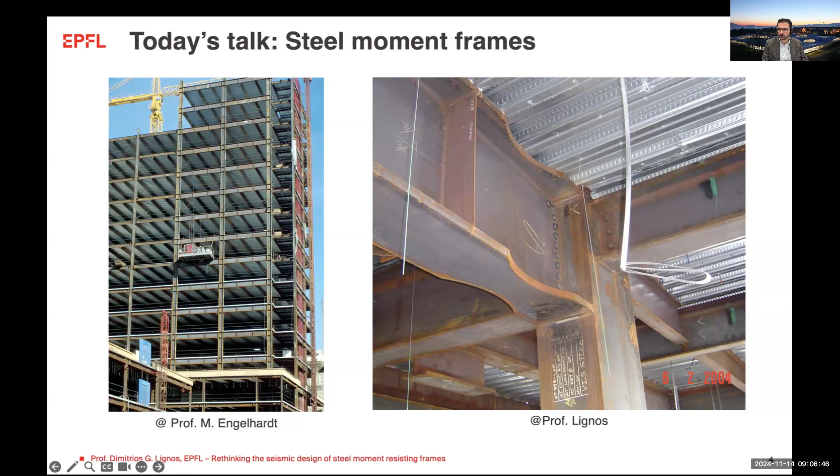A quick overview: as we know, a moment-resisting connection after the Northridge earthquake, primarily based on work done during the SAC project, will be assembled using mostly a strong panel zone design where energy dissipation is localized in the beams. Through local buckling, we anticipate the beams will absorb the energy released by the earthquake. Now, for the welded connection, usually you'll use a backing bar that we remove and back gouge, perhaps reinforced with a fillet weld here, to ensure the fracture potential of the connection has been reduced, at least based on what we knew, or know, today.

For capacity-designed steel moment resisting frames, what we call in Canada ductile moment frames, the intended dissipative zones during earthquake events would be more or less at the beam ends. Assuming the connection details are done correctly, plastic deformations will localize in the beams, and after flexural yielding, we would anticipate local buckling within the dissipative zone. Or if you're looking at the base of the columns, these are fixed-end columns - in this case we should anticipate plastic deformation near the fixed end, potentially followed by local buckling, as we see here in this photo.

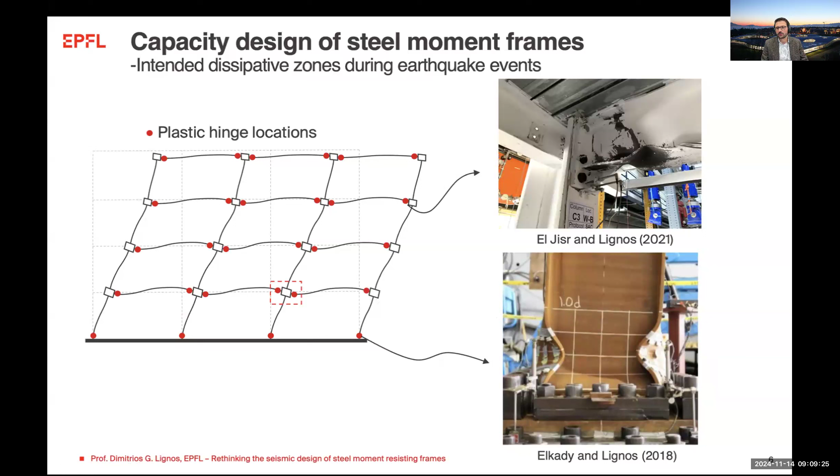But if you are looking at this from a financial perspective, then this damage that I show here would potentially have to be repaired, or if the building essentially ends up having a very large residual, then we would consider the potential for demolition.

We've done loss assessment in several steel moment resisting frame buildings, and we looked at monetary losses due to repairs after an earthquake. This graph is indicative, showing expected losses as a function of seismic intensity. For seismic intensities at a design level earthquake, losses are governed by structural repairs as well as repairs in the non-structural content.

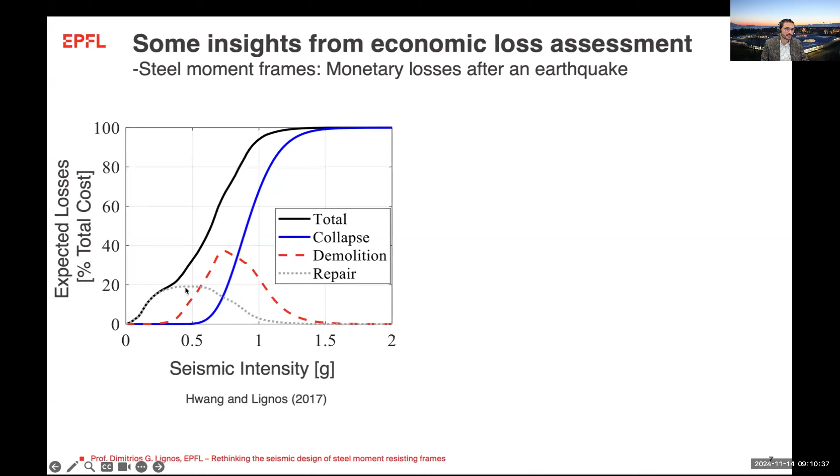But when the seismic intensity increases, the dashed red line demonstrates that demolition may be a critical factor prior to the case where collapse controls losses. That would be under a rare event where the spectral or seismic intensity would be very large.

If we look at what this means for a steel moment frame as part of a building, for repairs you're going to need structural repairs because of local buckling at the fixed end shown earlier. If you're looking at the connection, you focus around the dissipative zone, mostly related to the beam that experienced flexural yielding and eventually local buckling. Judging this way of dissipating energy from a structural repair standpoint, this is not going to be very economic because it has to be fixed in the aftermath of an earthquake.

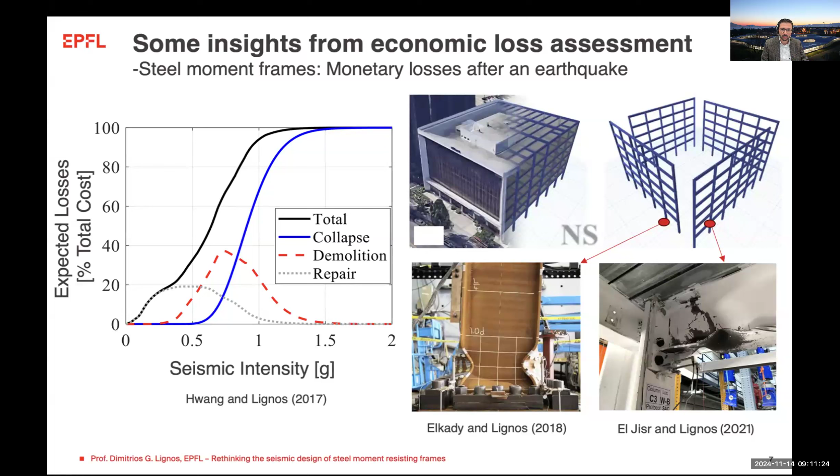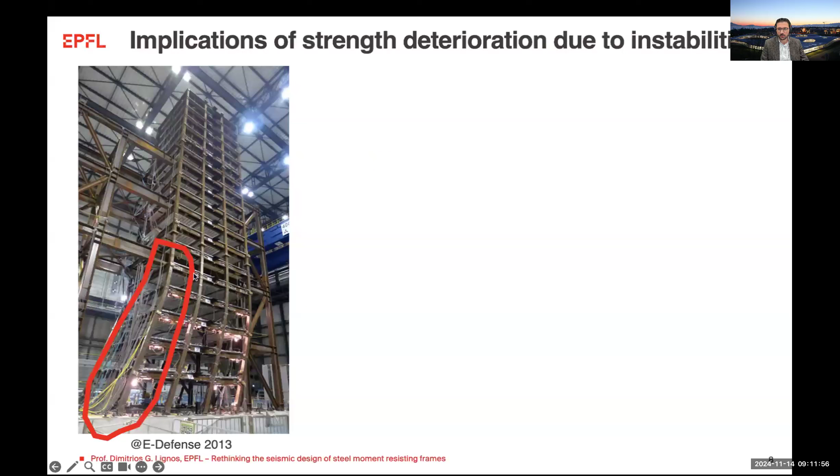Instabilities also have an implication on degradation and potentially structural collapse. Looking at a test from a few years ago at the E-Defense facility, a moment frame, due to the mode of deformation, would tend to localize deformations in the bottom stories. For seismic intensities related to modest events, we would get more or less the anticipated mechanism with damage in the beams as well as damage at the base of the column.

But if strength degradation kicks in because of the instabilities, then usually the beam marked with red is going to degrade. That creates redistribution in the system, and you would anticipate larger moments in the columns that, for larger or rare earthquake events, could potentially lead to plastic hinges in the columns, and eventually you could have structural collapse.

Because of this, engineers, or at least people like me, are interested in estimating the probability of structural collapse for moment frames as well as other systems. This is a graph that I usually use from Professor Krawinkler.

If you look at one ground motion and plot the seismic intensity versus the maximum story drift ratio, if the system doesn't experience degradation and you worry about second order effects due to gravity, then usually this could carry on for very large intensities.

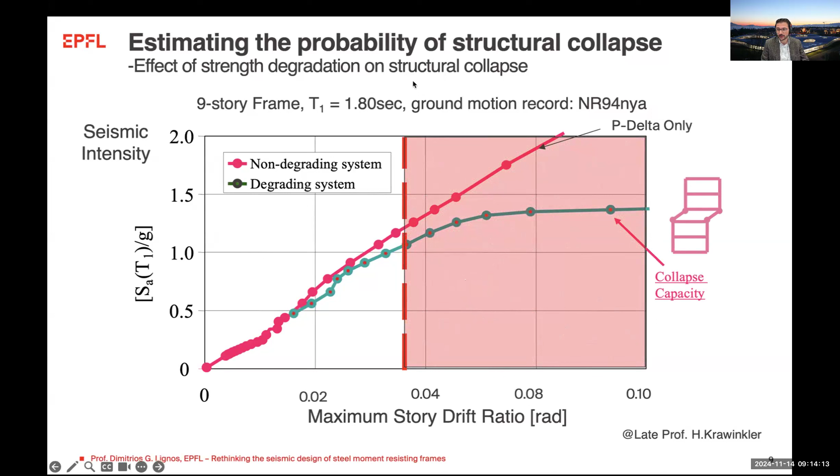Usually that can be done if you use models of certain sophistication, so you can actually simulate the influence of strength degradation on overall structural performance. These models have been around, and if some of you use them, you might have run into my name, especially on steel structures. They could be concentrated plasticity models, or fiber models, or rarely continuum models with higher fidelity.

What happens with these models is that you have to kind of predict relatively well when would be the onset of strength degradation. But based on our experience from test data as well as simulations, generally this point is associated with fairly large variability, and that variability gets transferred into these models that we use for predicting probability of collapse.

So now the question is, are you really predicting the probability of collapse accurately enough so that you can minimize the risk of collapse in degrading systems?

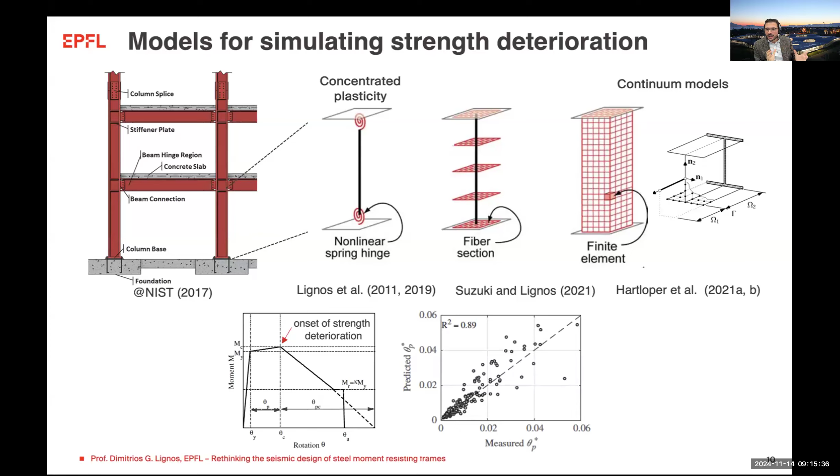At some point, when I was working on this, I started thinking, where should I go from here? Because most of my work relates to moment frames, I was thinking, is this really the right way of doing this? Or could there be different ways we could consider, perhaps rethink the design process, or rethink about technology, so that we can stay away from instabilities, potentially reduce uncertainty, and potentially reduce repairs. So when I was in California...

I read somewhere this interesting quote by Professor Ed Wilson from UC Berkeley, where essentially he was saying that instead of trying to develop more complex models to capture the variability of structural response, like the models that relate to the early part of my work as an academician, we should be designing structures that are less sensitive to uncertainty.

That made me think about how we could rethink the seismic design process of steel moment resisting frames, so that we can achieve such an endeavor. In the rest of the presentation, I'll be focusing on two things. The first is if we can identify or rely on alternative dissipative mechanisms than those of the current status quo, with which we could potentially stay away from instabilities, or at least delay them, and potentially reduce model uncertainty.

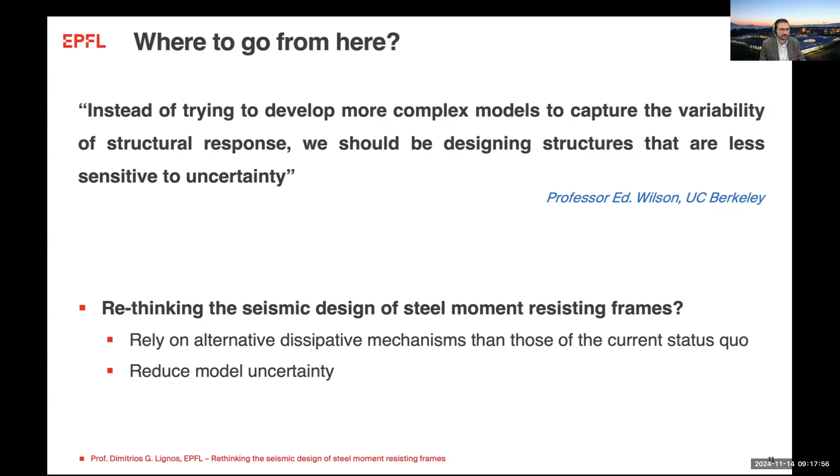I will start by identifying alternative dissipative mechanisms, and I'd like to stress the beneficial aspects of shear yielding, introduced firstly by Professor Krawinkler during his PhD thesis back in the 70s, done with Professor Popov and Professor Bertero, where they were looking at the potential behavior of panel zones.

Or moment-resisting connections that exhibit high inelastic behavior in the panel zones. What we know from this work is that panel zones usually exhibit shear yielding, and the behavior can be extremely stable even at very large inelastic shear distortions. If you look at the overall behavior of the connection itself, for very large drifts in the range of 6%, we get no degradation when the panel zone participates more into the energy dissipation of the joint.

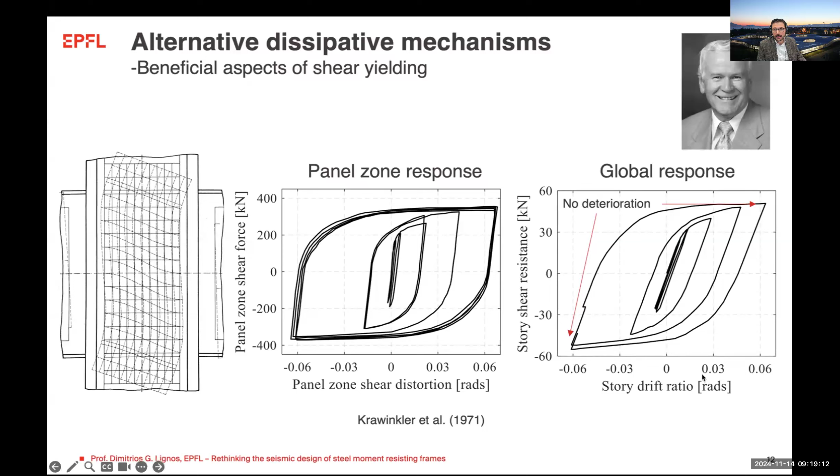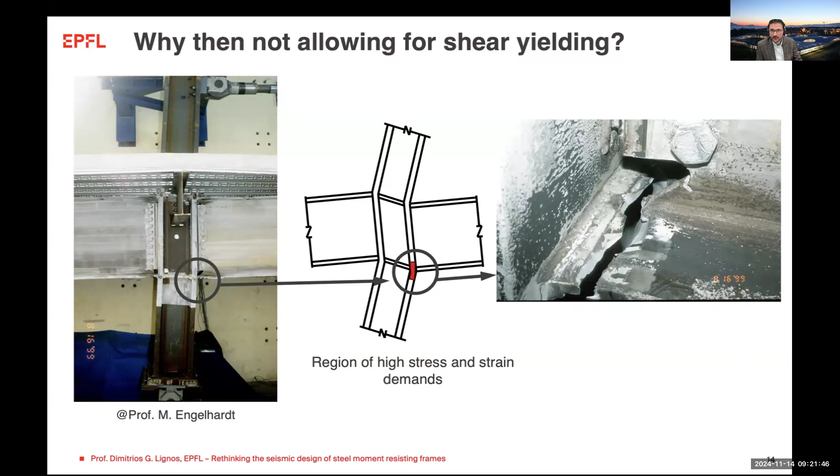But then the question is, if fracture does occur, what is really the drift at which this is actually going to happen? So we've reviewed and put together test data from post-Northridge connections, and you can download this data from our website. This is an interactive website where you can filter data on connections. If we set up the requirements to be post-Northridge connections, you can see out of these connections how many, in fact, experience fracture when we push the panel zone to be highly inelastic.

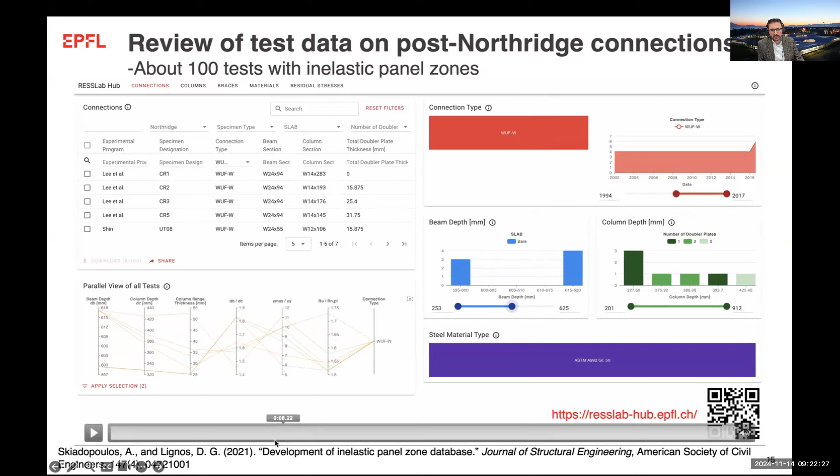So then the question is, if it's fairly marginal, do we really have the tools to be able to allow for inelastic design in the panel zones and kind of relaxed requirements in the beams. So what are the missing aspects that we have to accomplish such a design?

One of them essentially relates to limitation of the current design models to leverage shear yielding in a design context. The current codes use a trilinear model to design the panel zone, where you have to predict Vy and Vp. Vy is the shear at which the panel zone exhibits uniform shear yielding. Vp would be the plastic resistance of the panel zone, assuming that it reaches 4 gamma Y.

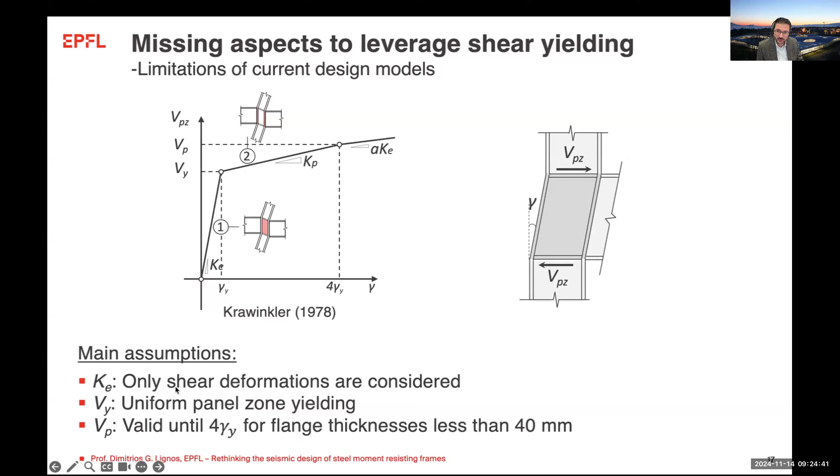What we see from these models is that essentially the elastic stiffness of the model is only considering shear deformations. This is why, when you compare the predicted stiffness from these 100 tests we reviewed versus the measured stiffness, we see deviations between the predictive model used in design and the actual stiffness, and these deviations could be in the range of 20%.

That's if you are comparing, for instance, with the model in the AISC provisions or the previous model in the Canadian provisions. But the same happens if you use other models available in the literature.

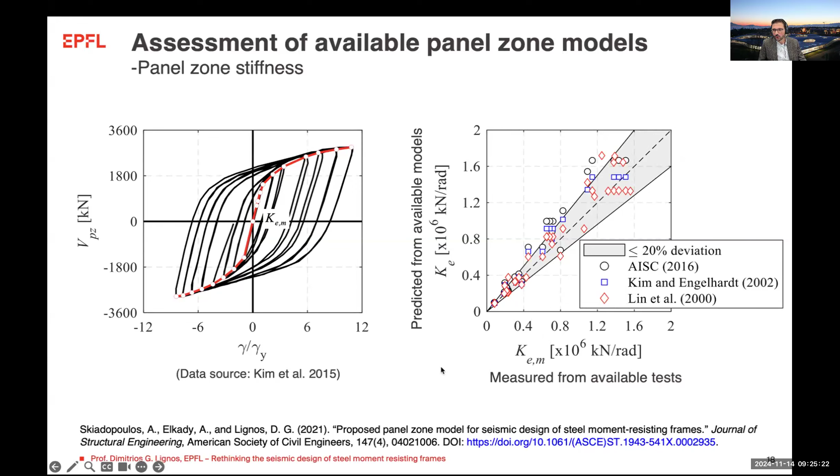So our first task here is to take a fresh look at the problem to develop a better panel zone model so that we can leverage it in the design of actual moment frames. The way we did this is by using continuum finite element analysis.

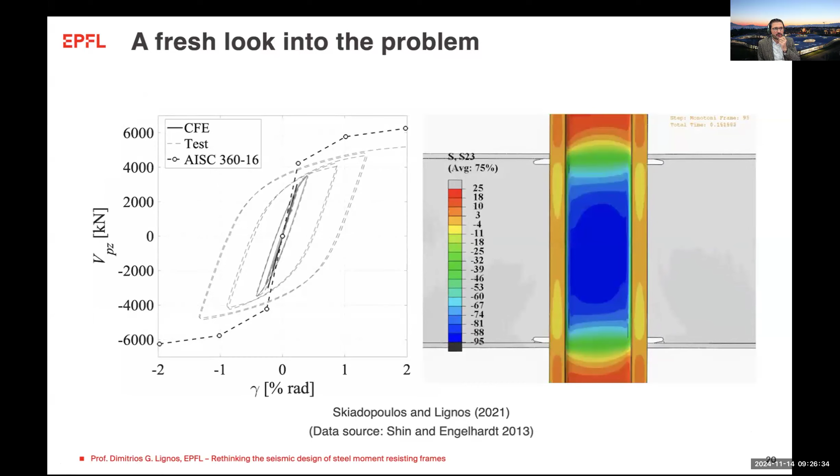With models such as the one you see here, we were able to predict relatively well what is happening in panel zone geometries in these 100 tests, but also a lot more geometries that we looked at, so that we can understand what is really happening in the panel zone and under what conditions. This finite element model is able to predict well, more or less, this test data in the literature.

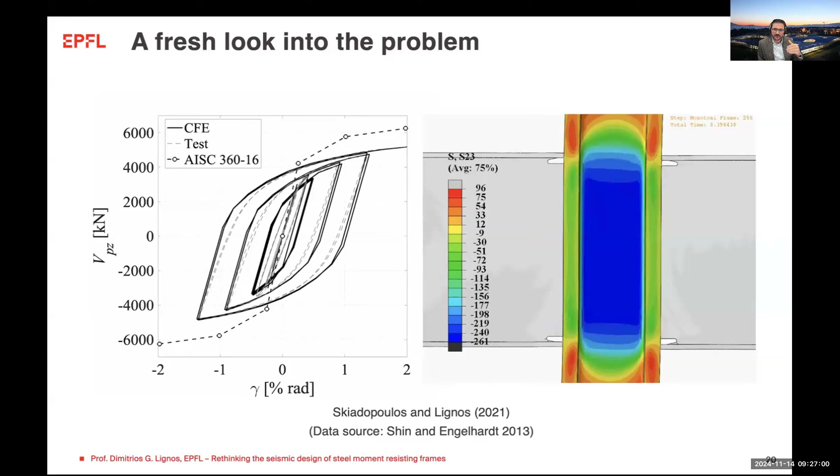But you also see something else: when you use the current AISC provisions, or the model that is in the current AISC provisions, that model overpredicts stiffness and overpredicts strength. This is why relying on panel zone shear could be an issue if you are not predicting strength correctly, because then you have not tuned the strength accordingly.

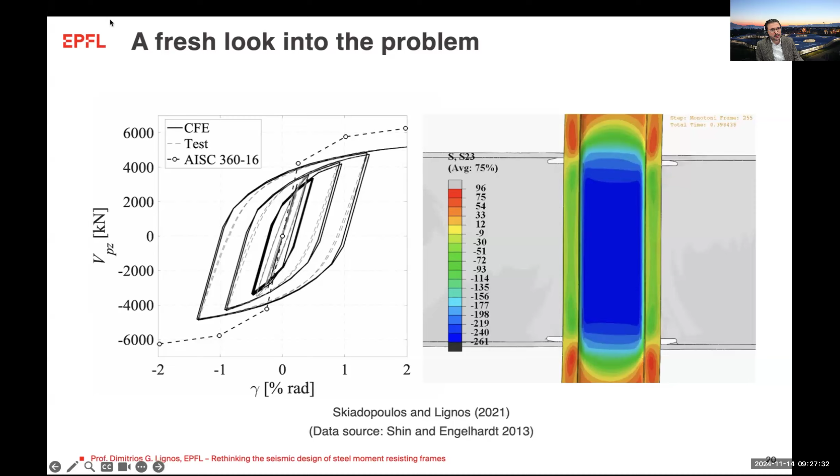So to fix the problem with stiffness, we developed a model that is able to trace not just shear deformation in the panel zone, but also the contribution to bending because of bending in the flanges. That could be important, especially if you're dealing with very deep beams that are characteristic in North America.

With a simple model here, you are able to capture both the flexural and shear contribution to the elastic stiffness. Now, if you compare the predicted stiffness of this model versus the one measured from the 100 tests I showed, you see that I can reduce the error in the stiffness relatively well. That's because I'm able to actually capture the flexural deformation in the flanges, especially for panel zone geometries with very high aspect ratios.

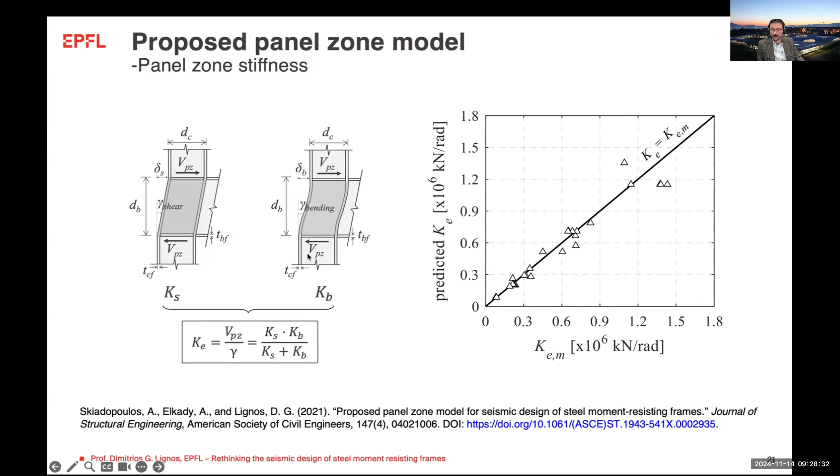Now, with regards to strength, looking at the mechanics of these panel zones, we split the data we had available into geometries where the beams would be in the range of W30 by 108, and the column would be in the range of W24 by 131. So you would have a panel zone geometry here where the aspect ratio is perhaps close to 1.

What happens here is that in columns where the flanges are not relatively thick, the flange contribution is fairly minor. But if I'm looking at columns where the thicknesses are relatively high, the flange contribution into strength starts to become very important.

For this reason, we developed a new model that relies on mechanics and captures the contribution of the web as well as the contribution of the flange. The trick goes into these coefficients, AW effective and A flange effective, where with explicit analytical expressions you can capture the contribution of the web and the flange much more accurately than what's in the literature right now.

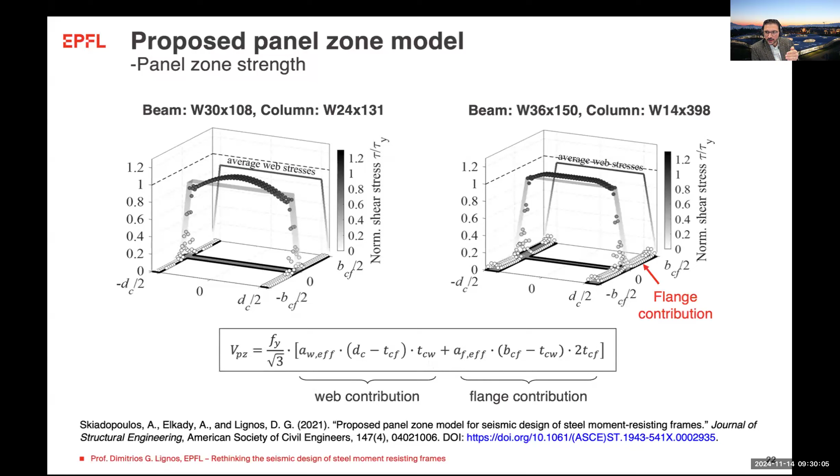If I show you here some of the comparisons I was showing before, comparing the prediction on strength, VP, versus the one measured in experiments, and comparing with what I'm getting with the proposed model, you see that even in the range of very thick flanges, I am able to reduce my error by 40%, and I can predict strength within 10% error accuracy, regardless of the column flange thickness.

I think one of the biggest contributions of this is that this model has now been adopted in the newest revision of CSA S16 in the seismic design of ductile moment frames. Essentially, you can predict VP now with this model, which relies on this work.

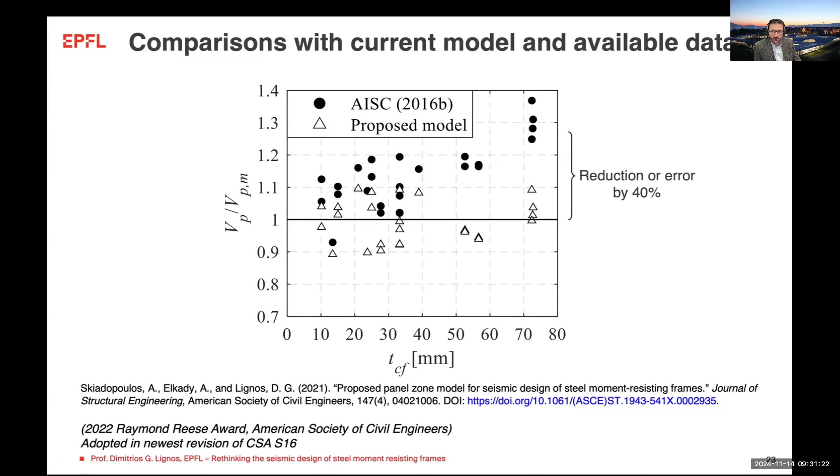So assuming I have a model, I can tune the strength of the joint better. Now, a couple of other things we were interested in relate to fabrication detailing.

In particular, when looking at the way we fabricate welded joints, as I mentioned before, in this region we usually use a backing bar to complete the complete joint penetration weld. Because of the detail here, I have locations of potential flaws marked as L1, L2, and L3. Assuming you're using new construction materials that we use today, L3 should not be a problem because it's related to through-thickness properties of the flange. So essentially the focus is on L1 and L2, which would be potential flaws because of the welding process.

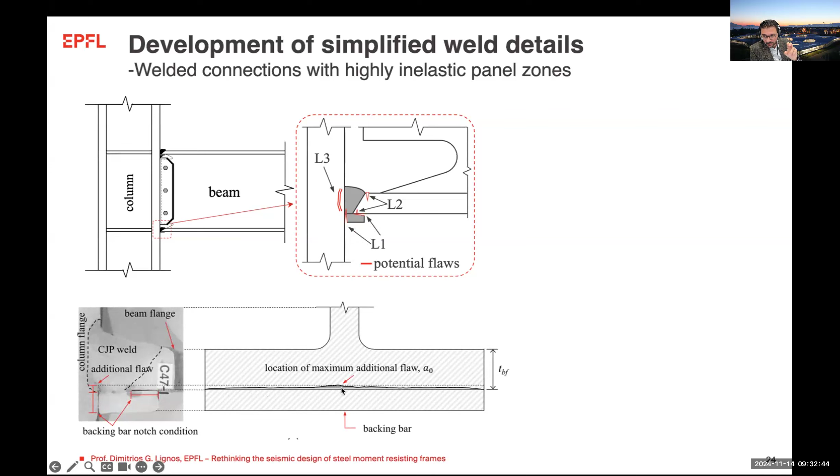This is a snapshot from a pre-Northridge connection. Usually we like to remove the backing bar here because behind it you may have a flaw running across the flange. And if the flaw is large, this is essentially a region where the risk of fracture is going to be very high.

So what we've done here is use simulation-based design to explore the possibility of not removing the backing bar after the weld is completed, to minimize two things: inspection processes, because if you remove it, you have to inspect and make sure the flaws are sufficiently small, otherwise you have to back gouge and repair; and we wanted better quality in this region so we can minimize the fracture potential, particularly when we increase the energy dissipation in the panel zone.

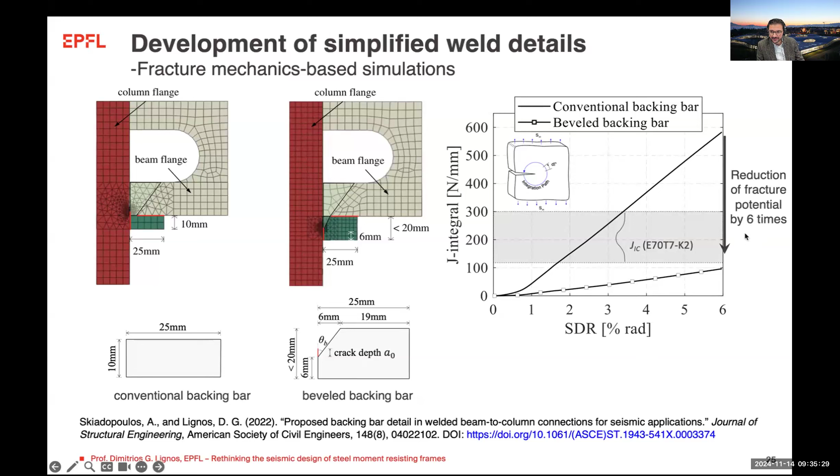And in this case would be larger than 6%. And this is a pre-Northridge connection. So we thought that this is actually promising, since the fracture potential for pre-Northridge connections would be reduced by 6 times by simply introducing a bevel in the backing bar.

With that, we went on to conduct tests where we wanted to construct a beam-to-column connection the way we do today, but achieve stable hysteretic behavior through an alternative dissipative mechanism, which is shear yielding in the panel zone. At 4% drift, we would like to have at least 15 gamma Y in the panel zone, so highly dissipative. We want to prevent beam local buckling prior to a lateral drift of 5%, so that we can minimize repairs in the beams in the case of modest drifts, and so we could alleviate or delay instabilities, which would naturally increase the capacity of the system against structural collapse.

The third one relates to weld technology, and in particular beveled backing bars that are left intentionally in place, so we can examine if this really does work, which would be very interesting from a fabrication standpoint. Here you see the panel zone geometry, as well as the beveled backing bar that was left in place prior to welding, including the bevel I showed before that we used in the simulations in the previous slide.

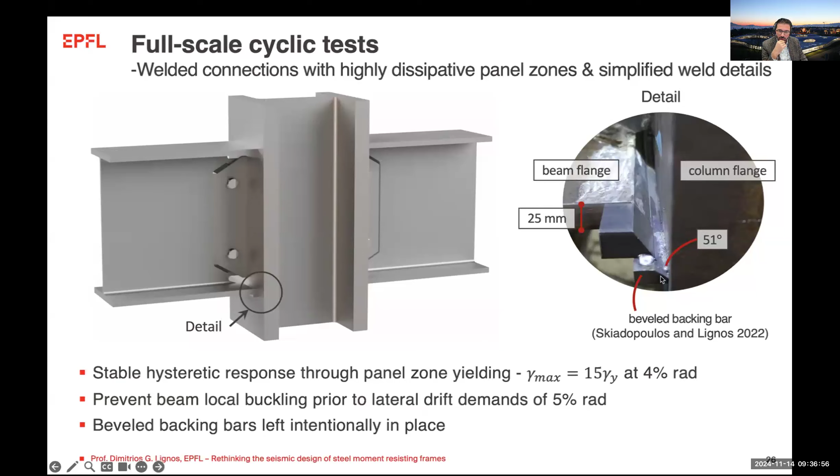So we did the beam-to-column testing of interior joints here, but in a horizontal fashion, where you see the two beams that were loaded with 2 actuators at the beam ends. The column here, with relatively thick flanges, like 70 millimeters, was also subjected to axial load, at 20% of the nominal axial resistance of the column.

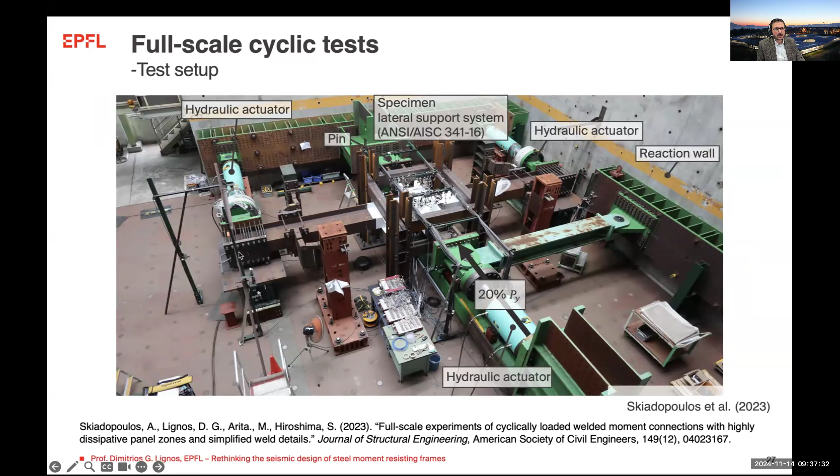So I'm going to show one of these tests based on the AISC loading protocol. Here you see the beams loaded pretty much as I discussed, and here you see the beam-to-column connection with the backing bars in place, both at the top and the bottom. Also here you see the panel zone that is instrumented because we're interested to measure the panel zone shear.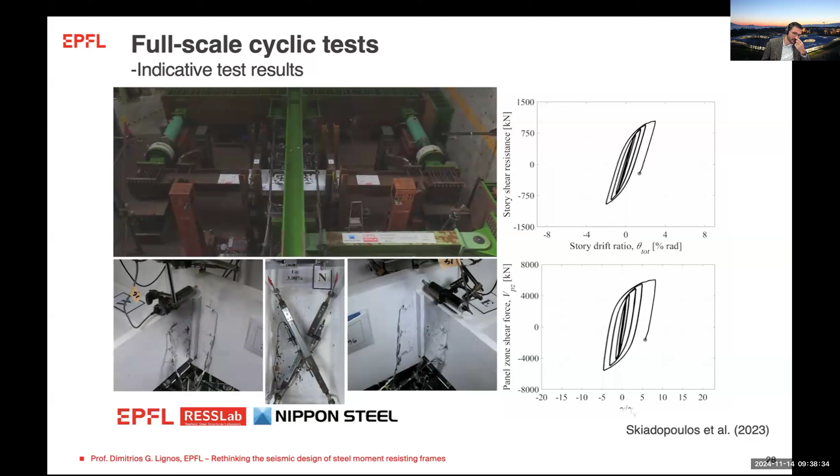Now, if we keep pushing this to pretty much larger inelastic cycles according to the AISC protocol, you get a substantial yielding in the panel zone. The beams start to exhibit again flexural yielding, but notice that for a 4% drift that meets the AISC pre-qualification criteria, you get no degradation in the joints, and the panel zone is at 10 gamma Y. Notice that we get no fracture, although we have left the backing bars in place. In addition, if I inspect the region near the beam flanges, you see that I don't get any buckling, so repairs would be pretty much only associated with flexural yielding.

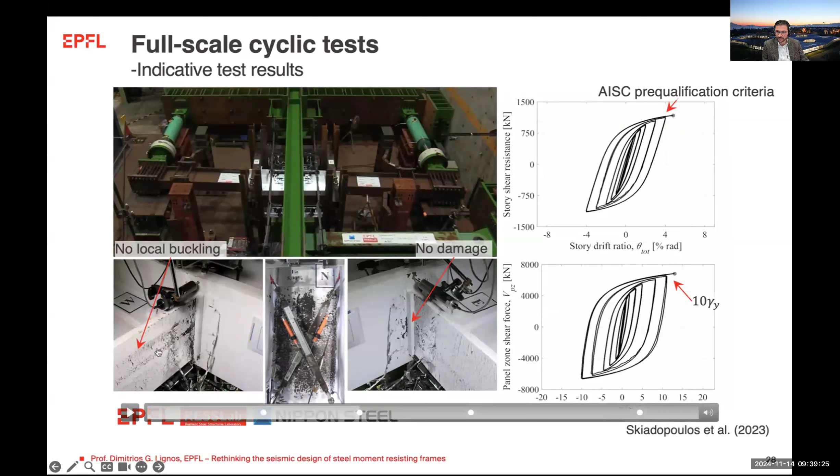Now, we kept testing this up to pretty much the equipment limitation. What we saw is that, in fact, our objective to achieve stable behavior at very large drifts was actually met, which was quite interesting because that would mean I have instability-free performance by leveraging shear yielding in the panel zone without exhibiting fracture as anticipated in these connections.

Notice here that I am indeed above 15 gamma Y, and I'm already at a drift in the range of 6%. So we kept testing this, and the ultimate failure mode in this case would be ultra low cycle fatigue, but that would only happen at drift levels well above the maximum considered earthquake, in a range where the system is not going to be governed by degradation, but by P-delta effects. So degradation is not going to influence system behavior.

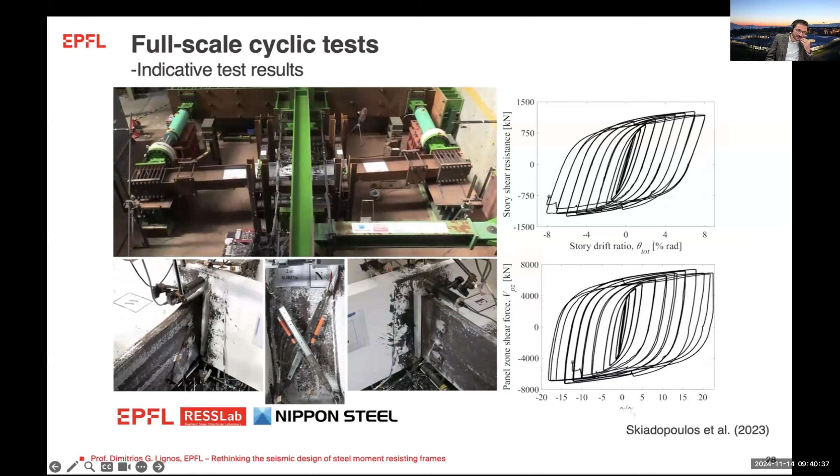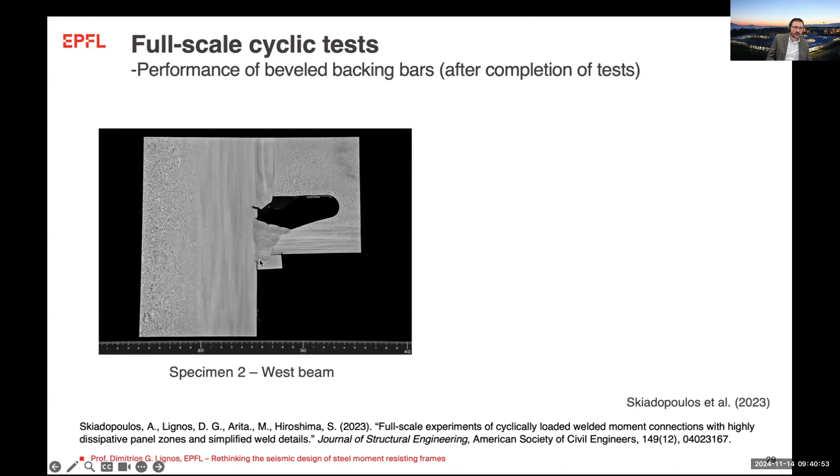So now, if we look at the region around the bevel backing bar, after the completion of the test, you see that I have no indication that cracks initiate in this region. And this matches, in fact, our finite element simulation assisted design, which was encouraging to see when you introduce the bevel in the backing bar.

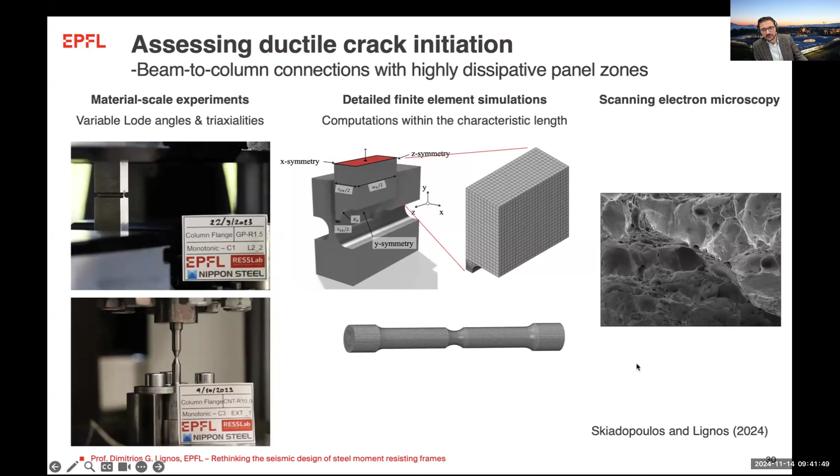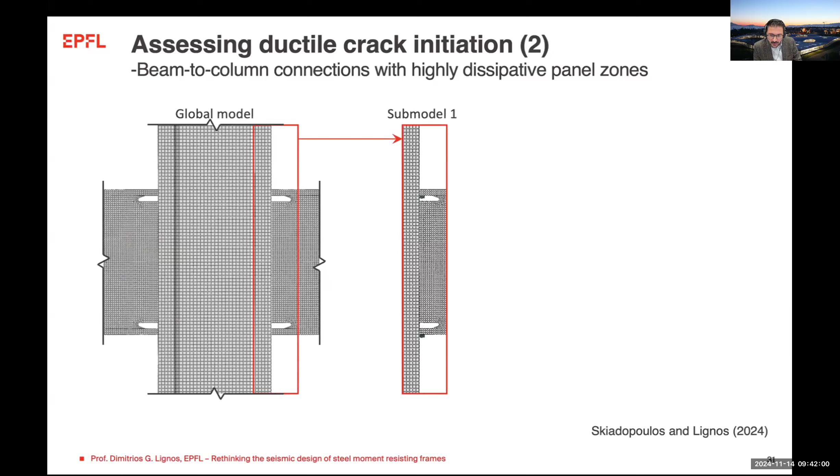We've also looked at this with serious continuum mechanics simulations, assessing fracture potential using micromechanics-based models to find when ductile crack initiation starts, at what drift. We did several material scale experiments with different geometries, as well as finite element analysis to calibrate this test, and then by looking at scanning electron microscopy, we were able to calibrate these models. Going back into geometries of interest to the designer, we incorporated these micromechanics-based models and assessed the fracture potential near the region with the bevel backing bar, where we're usually afraid of fracture.

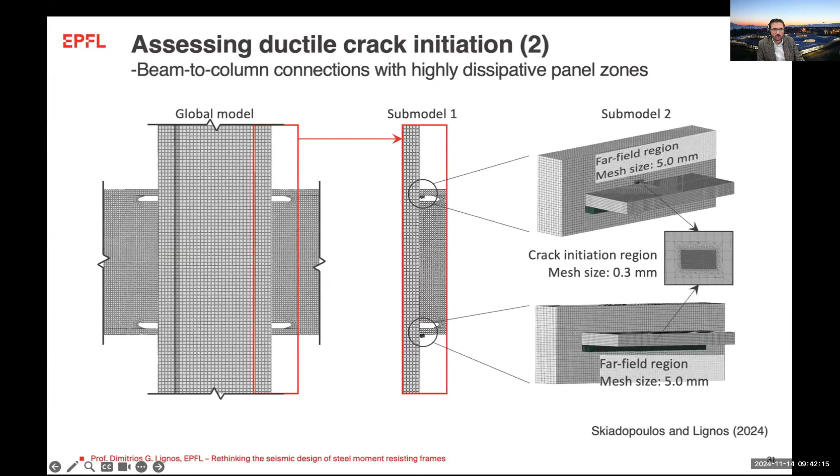Based on our work, using these micromechanics-based models, ductile crack initiation would not commence prior to an MCE level event. In fact, it would happen at a much larger drift, in the range of 5 to 6% that I mentioned before, where structural behavior is controlled by P-delta and not by crack initiation.

With all this in mind, we looked at the behavior of archetype buildings to assess the impact of these alternative mechanisms for dissipating energy. We looked at 32 steel buildings designed and analyzed in urban California, ranging from 4 to 20 stories, with different numbers of bays, like 3 and 5.

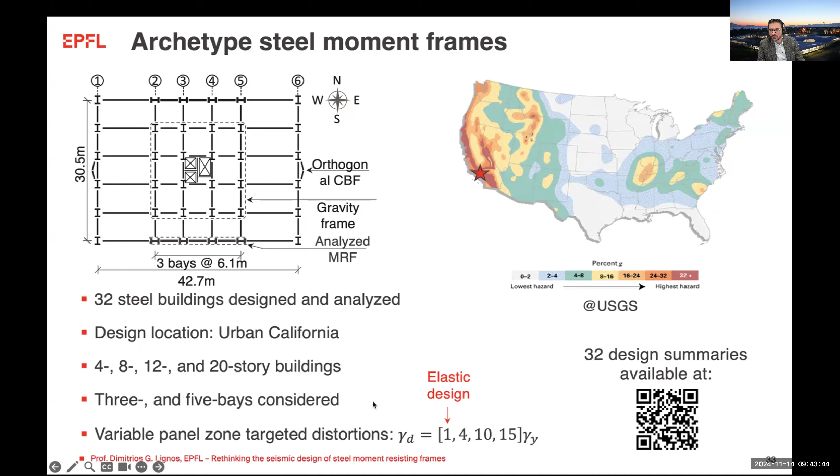We looked at variable panel zone shear distortions, where 1 represents elastic design, 4 is what's permitted by code, and then 10 and 15 gamma Y designs, which are considered highly dissipative. You can download all the designs using your cell phone, and they're also publicly available if you look at the paper.

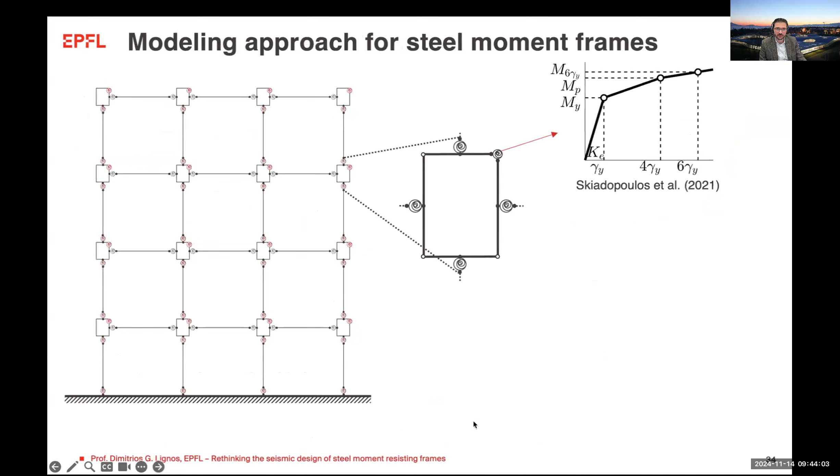The modeling approach featured the panel zone, using a trilinear model whose parameters we predicted based on what I showed earlier in the first part of the presentation. We also captured the potential of strength degradation in the beams as well as columns, based on prior work done in my group.

We are able to run simulations doing model updating, so that in case the panel zone shear distortion reaches a very large value, say 10 gamma Y, we set the panel zone and the beam strength adjacent to it to have zero flexural resistance, as if fracture happens at that beam.

This model updating is informed by the database I showed earlier, where we computed the probability of having fracture in the panel zone given a certain drift and a certain shear distortion.

What we're learning is that if you look at an indicative case, such as a 4-story, 3-bay moment-resisting frame, comparing code-compliant design versus highly dissipative design, where highly dissipative means the panel zone goes to 10 gamma Y, you get a benefit in the probability of collapse, reduced by about 50%.

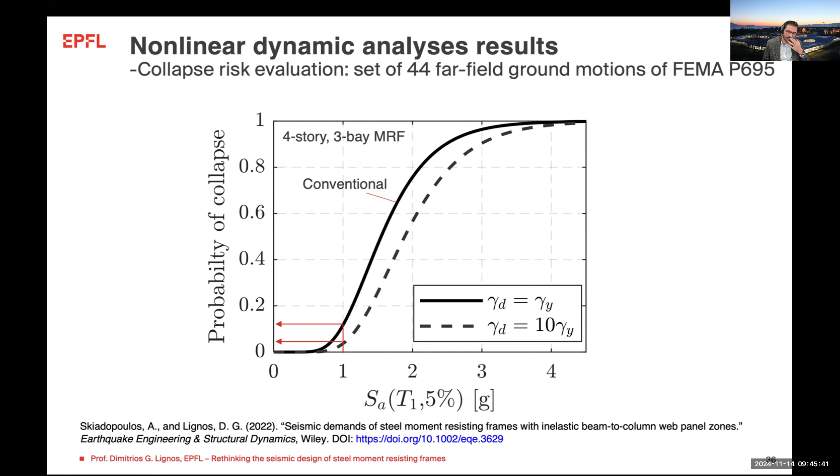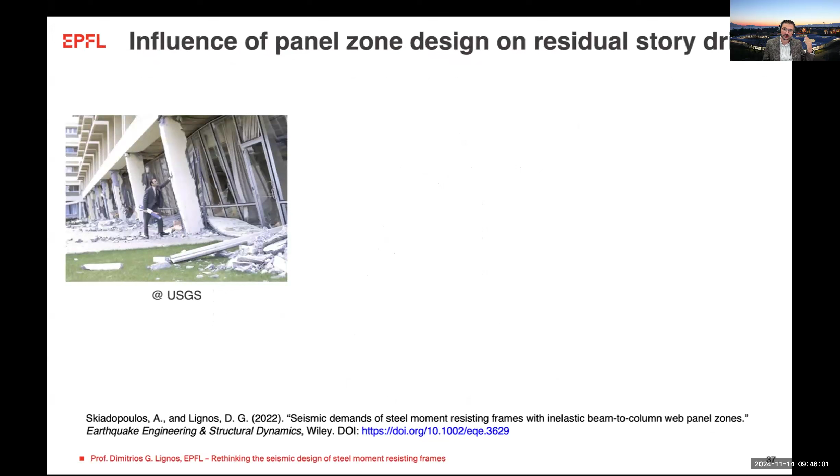But in my view, the biggest benefit is when looking at intensities that impact the residual drift of the system. With code-compliant systems, we worry about large residual drift, which could require demolition to be imposed. So to assess the potential of demolition, we collected residual drifts for all 32 designs.

Working within the framework of performance-based design, you can compute the rate of demolition by developing demolition hazard curves, integrating the site-specific hazard curve over a residual story drift curve.

By doing so, you can see that for design events with a return period of 475 years, the reduction in the average rate of exceeding residual story drift ratios is about 30% when the design allows more panel zone shear distortion relative to what's code-compliant right now.

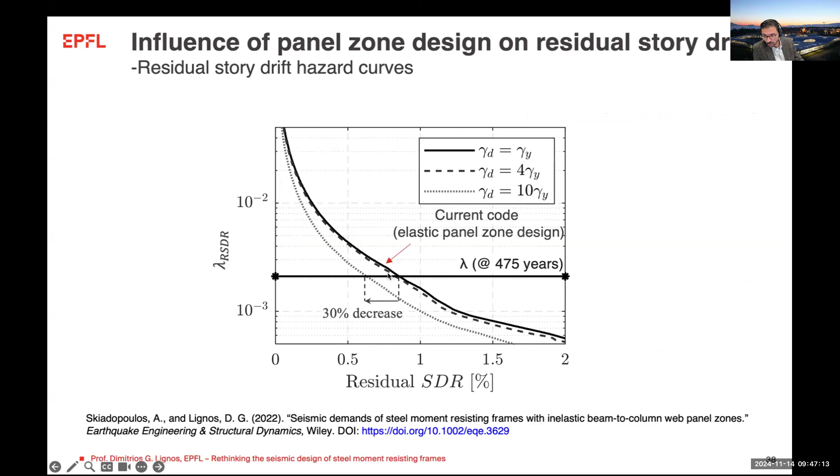Also, looking at different heights, the residual drifts actually reduce quite a bit, again considering return periods of 475 years, which in the US would be considered a design level earthquake.

This happens because the panel zone is able to supply the system with much more hardening relative to what the beams do, because shear yielding is known to increase hardening in the system, particularly when the contribution of the flange is also important.

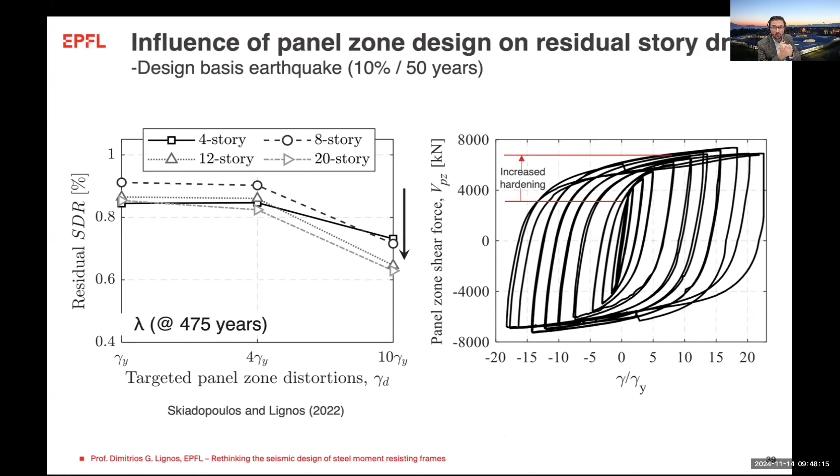Now, some of you may be interested in the case where you're using deep columns. In that case, if you have dissipative designs, what would happen in a deep column? With the current stability requirements we have for panel zones, you could induce buckling in the web.

So for that reason, we developed new web slenderness requirements for highly inelastic designs. We treated this as a plate problem, where we derived through stability theory what would be the corresponding stress at which you may have shear buckling in the panel zone.

Then for panel zone geometries that could be crucial, such as those with deep columns, allowing panel zone shear distortions in the range of 10 gamma y, we have a revised design rule you should use to achieve performance without exhibiting shear buckling in the panel zones.

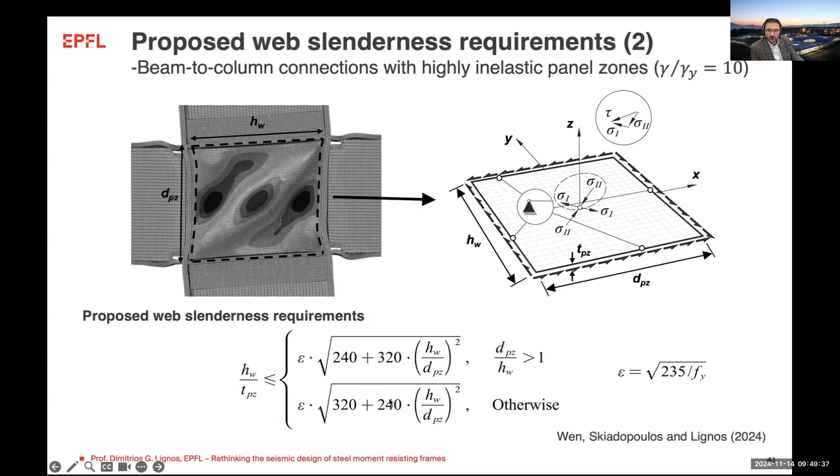I think I have about 15 more minutes or so, so I will shift the focus now away from the joint and talk about columns. When I was in Canada, I worked a lot on columns, but also a bit after.

This is one of the tests we did back then with my first PhD student, Ahmed El-Kadi, at McGill University. Here you see about a 4-meter tall column, where in this figure you see the fixed end on the web and on the flange side, and the moment rotation diagram synchronized under symmetric cyclic loading protocol.

What you see is that once you get to drifts anticipated at the design level event, the column starts degrading because local buckling kicks in. Because you have compressive axial load, that accelerates degradation. What's more striking is that besides strength degradation, you get axial shortening in the column because the gravity load is there and doesn't go away.

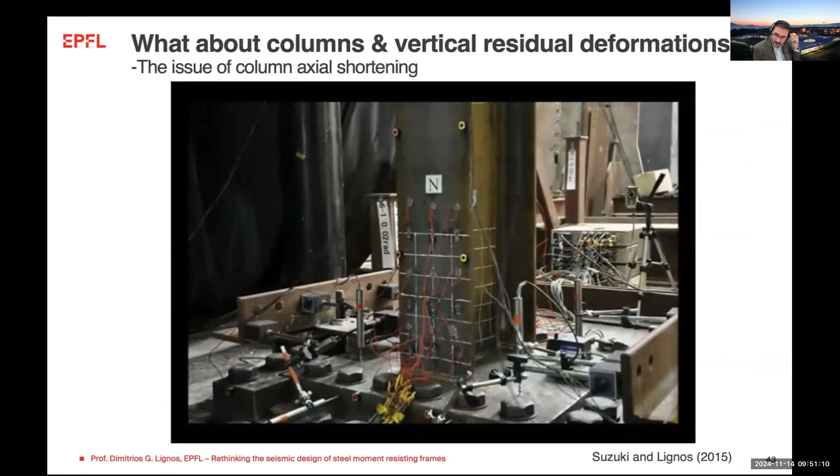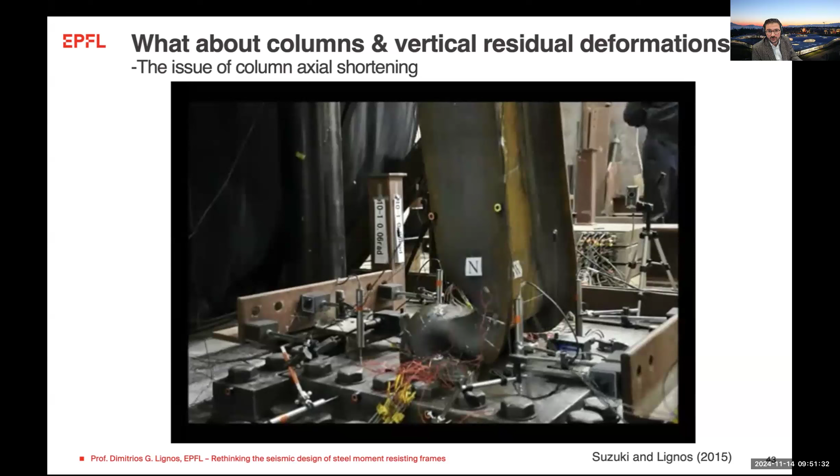Now, this is a slightly different video showing how critical this could be for a different column geometry, one that's fairly slender but still compact. You see that once local buckling kicks in at the fixed end, you get substantial axial shortening that you cannot control very well, even if you change cross-sectional geometries.

For instance, we've also looked at hollow sections that are interesting for Japanese designs. You see here that you again get axial shortening that, depending on the cross-sectional geometry, could shift from the conventional buckling mode 1, as we call it, to the elephant foot mode you see here on the side.

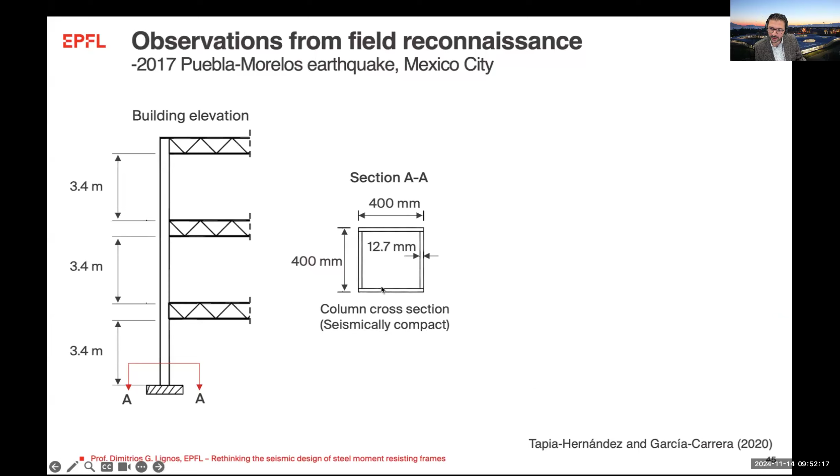If you think this isn't something that actually happens, look at some of the reconnaissance done from the recent earthquake in Mexico in 2017. This is a three-story commercial building designed with box columns. Four days after the earthquake, you already see the shortening happening, along with unzipping here in the welds.

But 51 days after the earthquake, you see that the column has completely squashed. Despite the fact that we didn't have substantial horizontal residual drift, we had pretty substantial vertical residual drift, and the building still had to be demolished, although residual story drift was nearly zero.

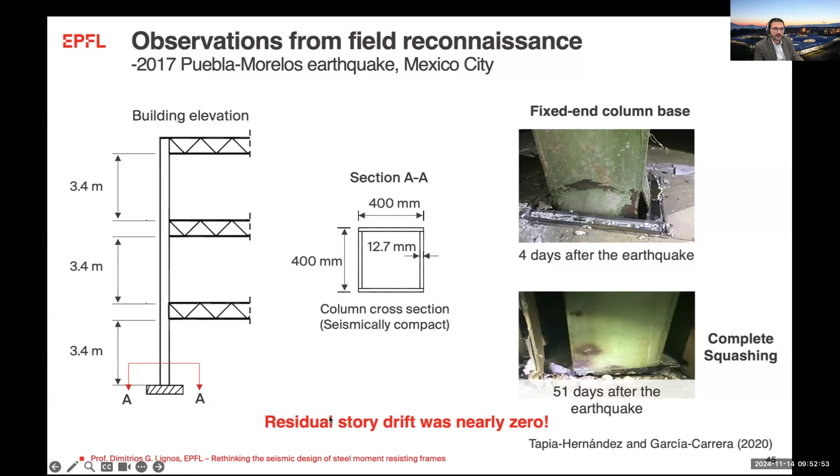So for this reason, again being provocative as I did with connections, we worked on rethinking column-base connections in moment-resisting frames. Should we really do what we call strong base, weak column design, where the plastic hinge is forced into the column, or should we do something else for exposed or embedded column-base connections, which we'll talk about here?

I will talk more on embedded connections here. Typically in a traditional embedded column-base connection, if you design it so the column concentrates inelastic deformations above the footing, what happens is when the column bears on the footing, you eventually get local buckling near the fixed end that concentrates right above the footing line.

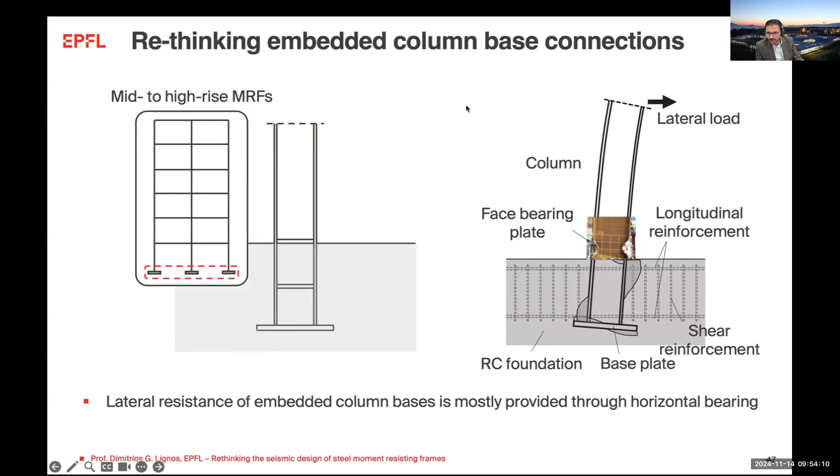Now, to tackle this issue, we developed the concept of a dissipative column-base connection for columns embedded into reinforced concrete footings, analogous to a buckling-restrained brace. We weaken the embedded part of the column into the footing, and we foresee that the dissipative zone will be inside the footing, but only in the steel part.

And essentially, it's concentrating in the steel part because, as we said, we are reducing the flange here. And what we do is that we are debonding the embedded part of the column from that of the concrete, so that when the column moves laterally, essentially you allow controlled rocking in the footing, and the footing actually works like a restrainer to the web of the column, so basically it doesn't allow the column to buckle.

So this can be done with a filler soft material that could be styrofoam, and basically this could be the same material that we use in a buckling restraint brace. And because we are weakening what happens here in the footing, essentially we are allowing the dissipative zone to formulate

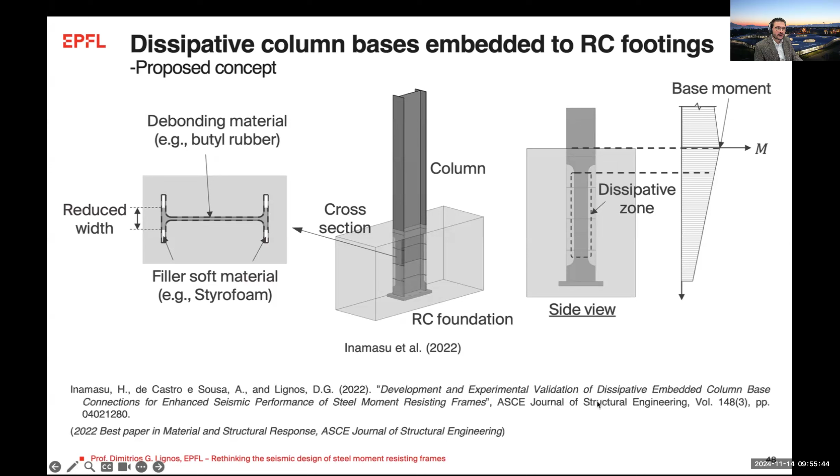Here you see how the filler material is being installed, and the reason why I'm showing this video is because we are not using any type of specialized construction. This was done by students, so we are not respecting any specific tolerances, or we're not really looking into a high precision manufacturing.

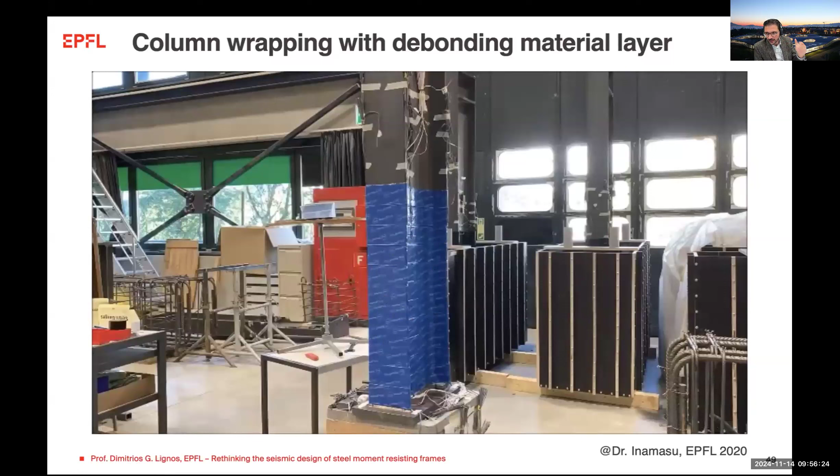Essentially, all we're doing is that we're cutting the embedded portion to the geometry we want, and then we are wrapping around with this sort of tape that's analogous to what we use in a buckling restraint brace. And if you are wondering about construction sequence, essentially the column wrapped with this material is installed and positioned with

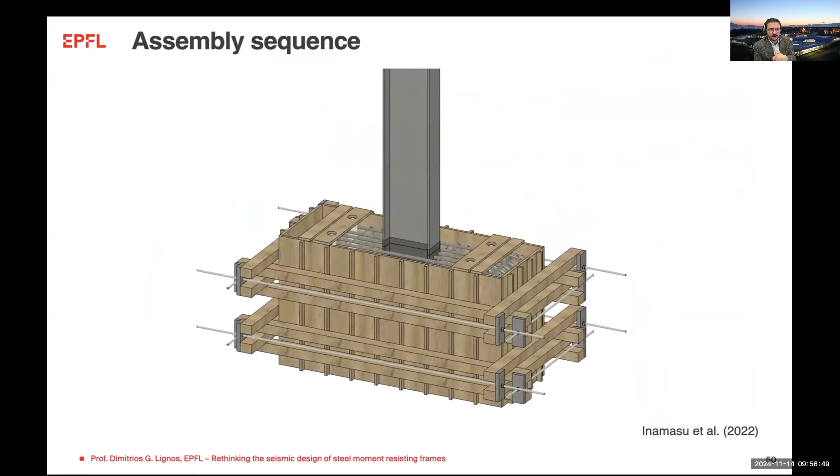4 anchors that are there for positioning. Then you install the reinforcement in the footing, and then you do the casting. And essentially once the casting is completed, you remove the formwork, and then we're able to basically have the embedded connection as we used to have before.

So we've tested this, and here you see tests on conventional bases as well as dissipative bases at the bottom. And here you see what would be the hysteretic behavior of the conventional base by allowing plastification above the footing. And here you see what would be the equivalent moment rotation relationship by actually employing dissipative base that is purely concentrated in the embedded part of the column.

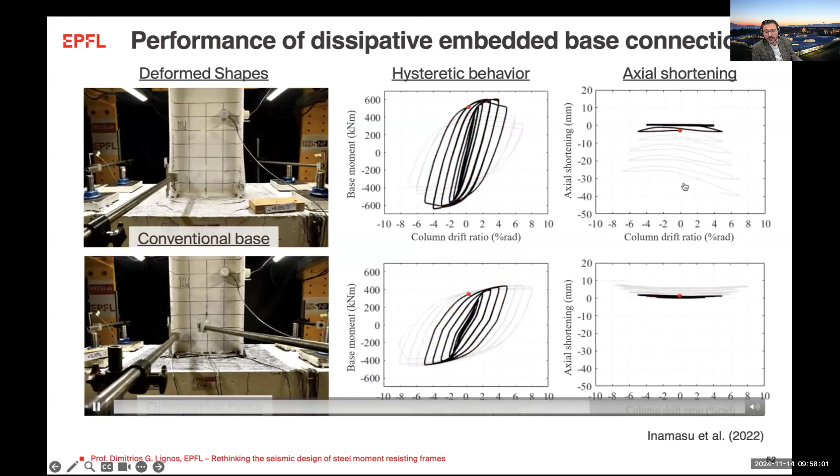And what we see here is that early on, or when the drifts are relatively small, obviously both elements would exhibit yielding as anticipated, but the conventional base, once you get out of the 2% story drift ratio, it would start exhibiting local buckling here as intended that would quickly start developing axial shortening, whereas the dissipative one enables controlled rocking in the footing. And not only can we achieve stable behavior to a drift that goes beyond 8%, but also we can eliminate axial shortening that is actually a pretty big issue as we saw before.

You might be wondering what this damage is, so this is damage that is happening only on the cover of the footing that generally can be fixed simply by recasting that part, which is

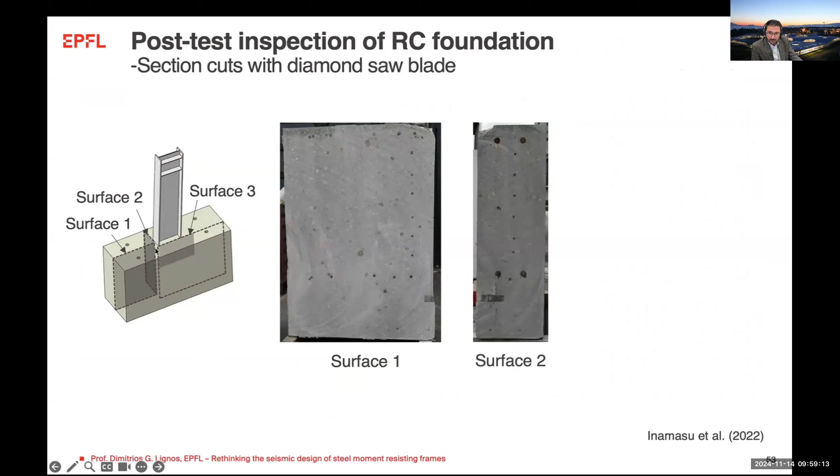not more than a few millimeters. We know this because we did section cuts with a diamond saw blade into the footing to inspect the actual footing. And here you see that for surface 1, there is no indication of damage in the concrete. Surface 2, the same, which is adjacent to the embedded part of the column.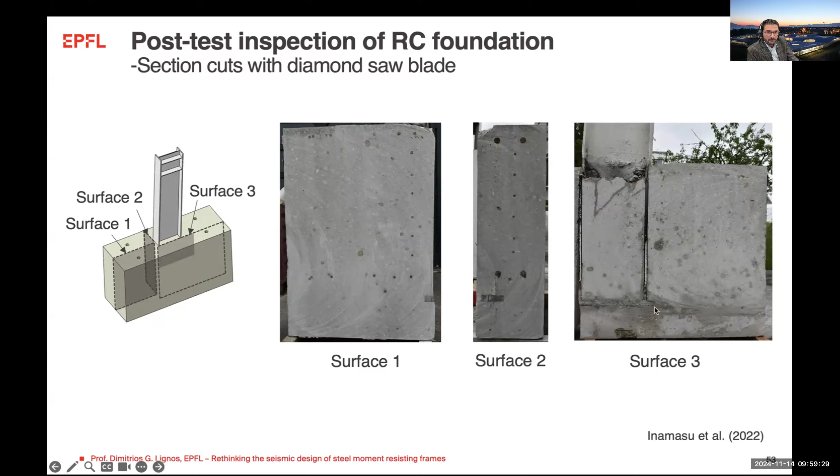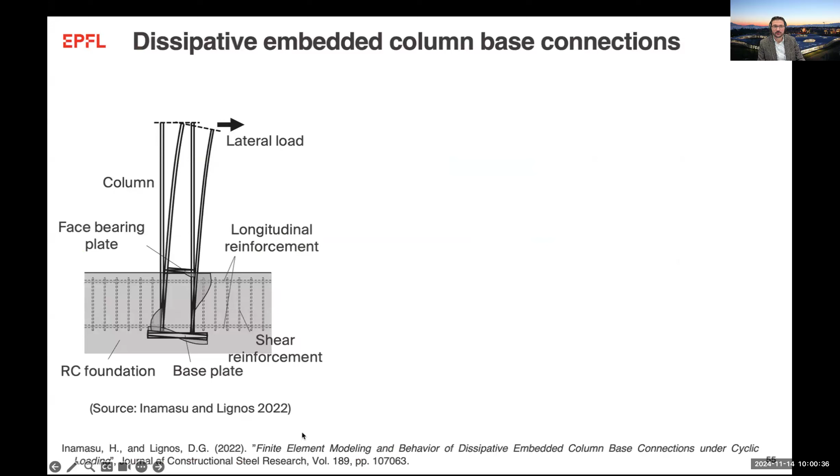weakening in the columns. Now, we looked at, through finite element analysis, different geometries, different loading conditions. We looked at different protocols. For instance, here, we're looking at the case where we contrast the dissipative base with the conventional base.

And you see that even at drifts that we're anticipating at the maximum considered earthquake, we get no degradation for the dissipative base, but also we get no axial shortening or very minor axial shortening because of accumulated plastic deformation within the dissipative part of the column. That is considerably less than what you would get if you allow local buckling in the columns.

And essentially, if you are looking at the deformations of the column near the end, in one case, you end up having substantial column axial shortening, whereas in the other one, you basically have only localization because of the yielding that essentially you allow in here.

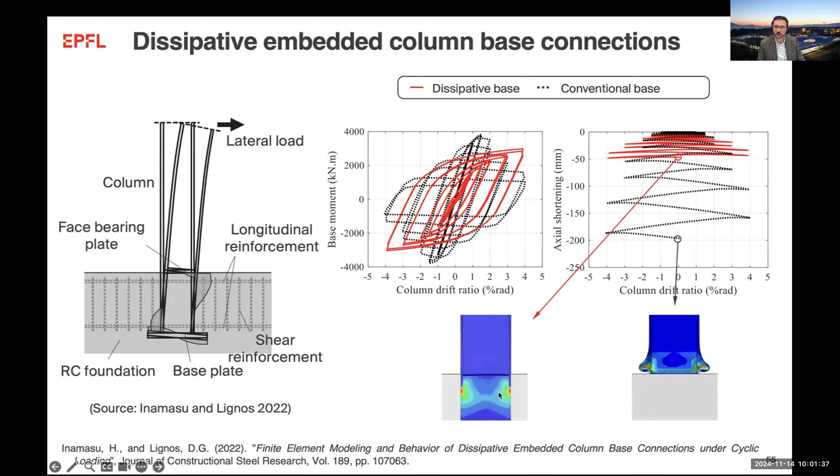We've also looked at alternatives for exposed column bases, where instead of allowing plastification in the column, you basically allow plastification to happen in the anchors. If you are careful in the way you design the anchors, you can essentially remove them and install new ones. That would allow a self-centering response without using a complicated fixture at the base, simply by allowing yielding to happen in the anchors. Essentially, you can achieve a self-centering response.

Before I wrap it up, we've done some building performance evaluations where we compare a conventionally fixed base design against one done with a dissipative base, for both a design level earthquake and the maximum considered earthquake. Here we look into cases where response duration could be very important, such as Oregon or Vancouver Island, where you may get ground motions with quite substantial duration. Using 44 ground motions, we see that for both the design basis intensity and the maximum considered earthquake, I can literally minimize axial shortening to almost zero.

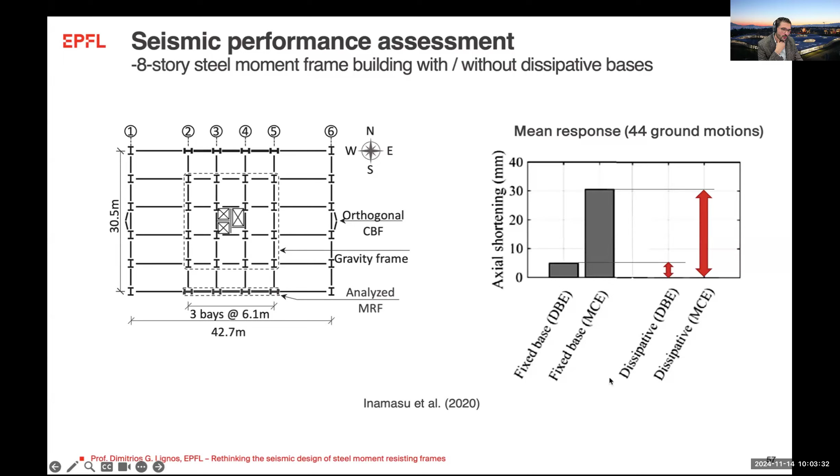So to summarize what we saw, the first thing I'd like to say is that hopefully rethinking the seismic design of steel moment resisting frames could be something that can be done, but I must say there still needs to be much work done.

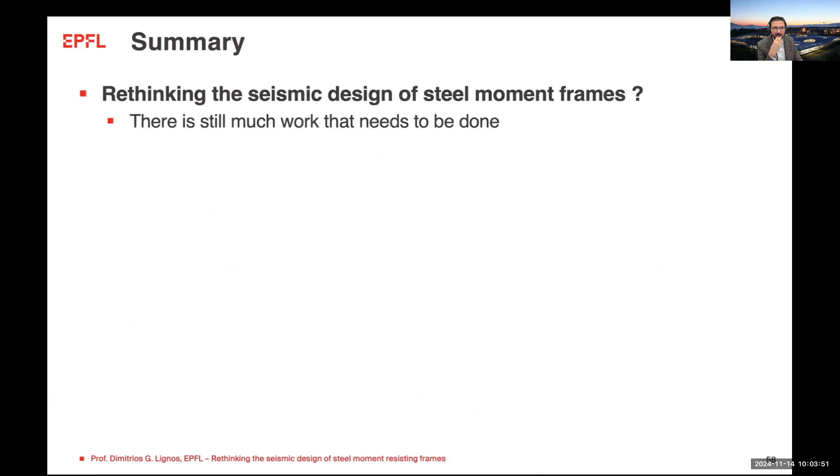Hopefully you were convinced about the beneficial aspects of energy dissipation through shear yielding. We saw two concepts: the first related to connections, where we can achieve instability-free performance up to very large drift demands of 6% or higher. This could reduce reliance on complex models, like the ones you've probably seen from me, to trace strength degradation mechanisms, because they simply would not happen at drifts earlier than 6%. You can also greatly reduce residual deformations, both at the story and member level.

We also saw some concepts that achieve this while retaining design simplicity. One was welded connections with highly dissipative panel zones. The second was dissipative column-base connections that essentially allow weak bases. What I'd like to stress is that these are not concepts that leverage dampers or other high technology. These are concepts where the designer simply uses alternative design checks and shifts the energy dissipation mechanism from one location to another, simply by following capacity design rules again.

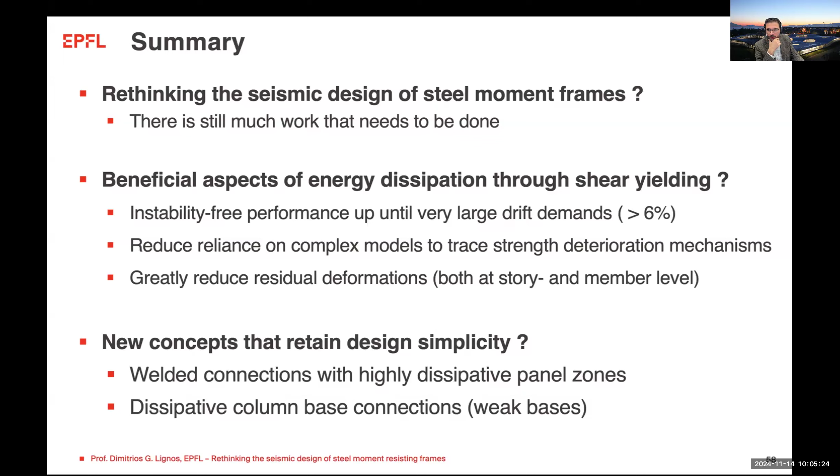So with that, I'd like to thank you very much for your attention, and hopefully this was interesting. I'll be happy to answer any questions.

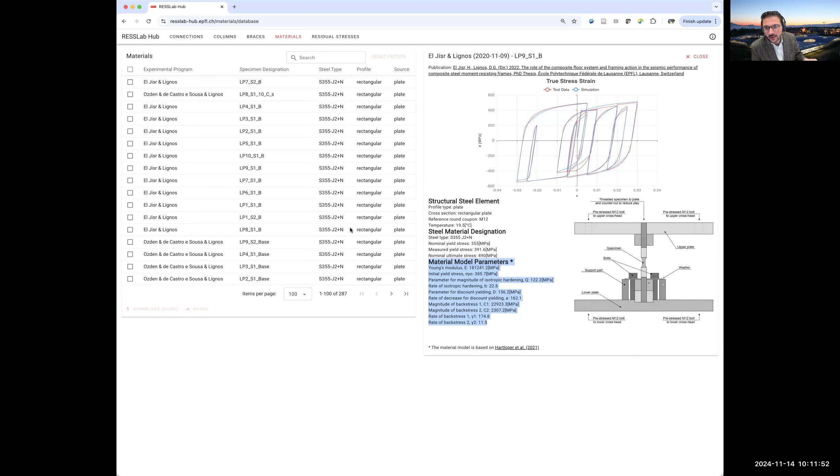Based on our experience with this problem, we think that this could be quite sufficient, provided that the kinematic isotropic hardening in structural steels is controlled by chemical composition. And if you are looking at, say, A992 grade 50 steel or others, usually the composition doesn't vary a lot if you ask a steel making company. In addition, it's controlled by the way that the steel tubes are produced, and again, the steel making company will have this quite well in terms of quality control.

So using a set of parameters for different steels that we provide here, we think that that would give you a pretty good validation of your constitutive model without having to do complementary tests.

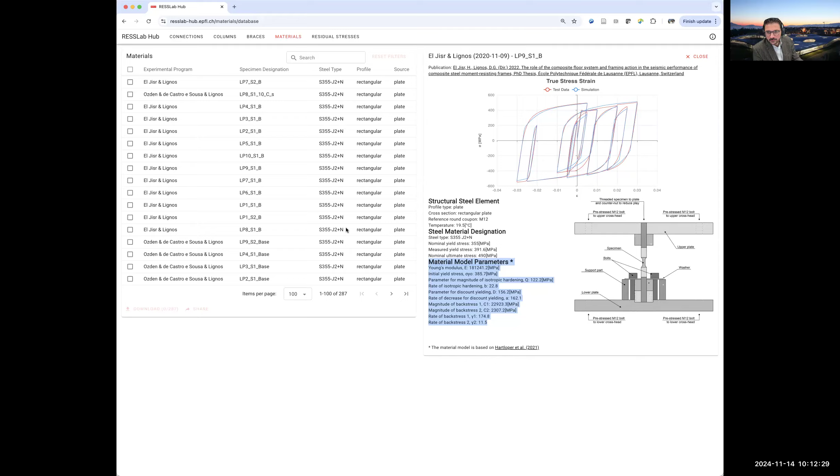Now, going back to my presentation, as I mentioned to you, we've looked at some of these validations at the finite element scale. Let me just try to go back. When we were working with these sort of columns that I showed, some of you, can you see my presentation, or you're looking at the presenter mode?

Some of you may be familiar with some blind analysis competitions that were granted from the National Institute of Standards and Technology, where we use this type of methodology on model calibrations and so on. And we were able to successfully reproduce the behavior blindly of different elements that were tested simply by using some of these things that I showed you.

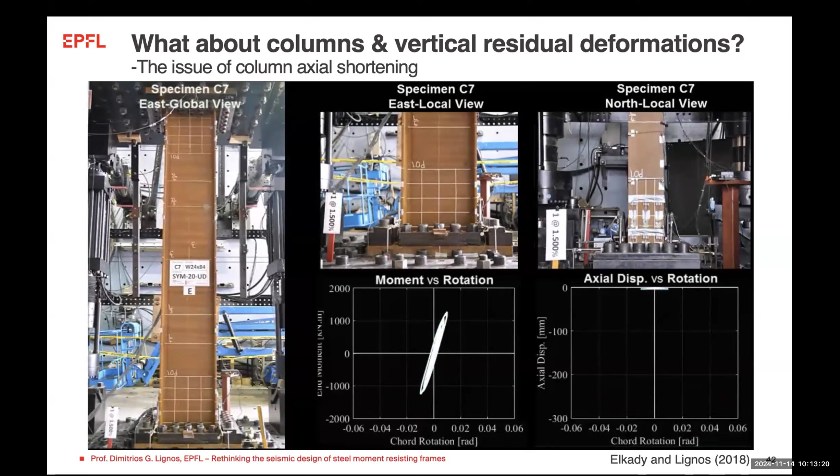Yeah, exactly. That was my point as well, because you talked about the parameters, and I would say phenomenological constitutive modeling, like the classic ones, which works with calibration and parameters. But when it comes to a purely data-driven model, it doesn't need the parameters, and it's just calibrated with the data itself. It's kind of challenging to compile it into a nonlinear finite element procedure.

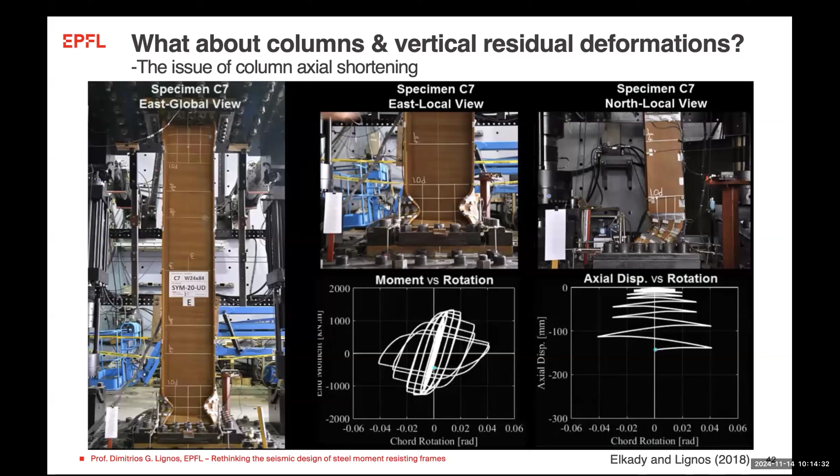Because it's like at a material scale, and the uncertainty I'm interested in is in material scale. But when I go to the modeling, there are a couple of uncertainties at other levels, like for example, in the OpenSees procedure, in the section constitutive behavior, in the elements I choose. So if you can, I don't want to waste others' time, but if you can shortly guide me on how you control the uncertainty to see what's the behavior of what you're interested in, like the material behavior, to control that.

Yes, maybe I can answer this in a brief way. So the way we treat this problem is that we break it down.

So if we talk about finite element or OpenSees, essentially the way we treat this problem is that you have to consider a constitutive law that is calibrated properly, and I showed you how. Then you have to consider imperfections in your finite element model so that you can trigger buckling at the right time. We have provided pretty detailed studies into what imperfection amplitude should be. In particular, we have shown that if you are assigning imperfections in the range of d over 250, d being the web depth of your member, and bf over 250, which is the flange width, then you can actually capture the onset of local buckling pretty well.

And then the third ingredient you need is a residual stress model, because there could be cases where lateral torsional buckling could be controlled by residual stresses. For that, again, we have a residual stress model that you could use without having to worry about this.

Now, if you're looking at OpenSees, as you said, discretization would be important, but usually discretization is important if you're dealing with softening, because you get strain localization. So in this case, if you are using a fiber-based model, not like a continuum model, I would have to be careful to either use a regularization scheme with a given discretization, so that I can alleviate the mesh dependency I'm going to have.

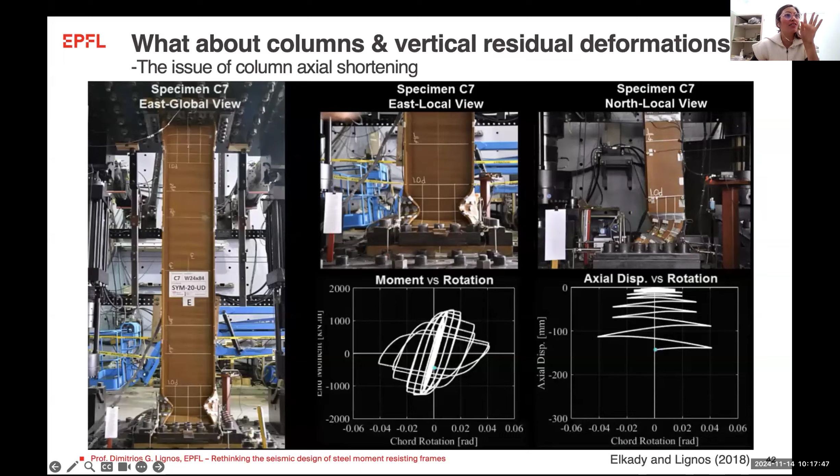Dr. Golestani, sorry for interrupting, it is intermittent. I really cannot hear what you were asking. Maybe you can type in chat and I can read it for you. Your voice is chopping a bit, and I understand you are asking something about the debonding layer, but it was hard to understand the question because it was chopping. But if you type in the chat, we can try to answer.